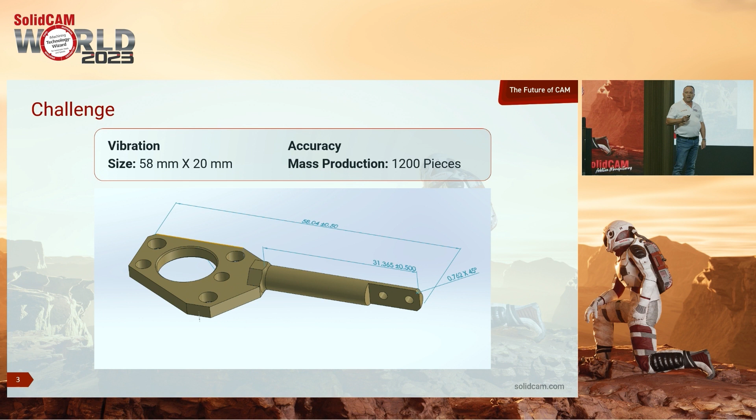And we have a few challenges in this part. First, we need to avoid vibration. Accuracy is very important in this part. The size is 58 by 20 millimeters. And mass production, 1,200 pieces. It means every second, every minute for the factory is pure money. So it's very important that we have strong functionality and wise technology. Let's see how we did it live in SolidCAM. Not me, this user. Let's start.

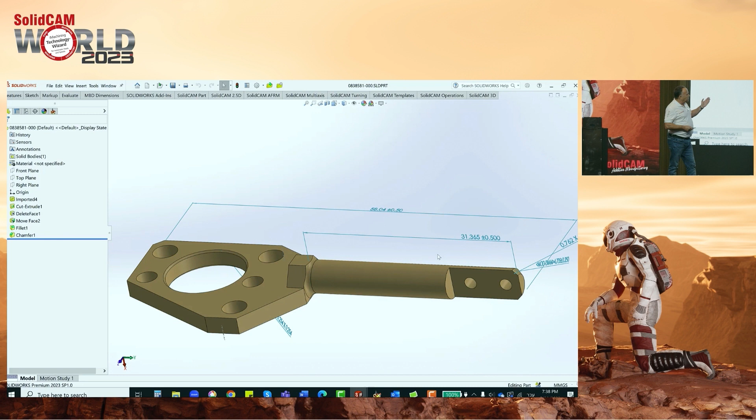Okay, we are now inside SolidCAM. I just recorded myself. So we can see here a part, 58 millimeters. Look at the right side of the bar here. It's just 4 millimeters diameter, along 31 millimeters length of the bar. So it means we need to know how to machine it. The machine in this case is DMG Mori, as we have in Schramberg in our center.

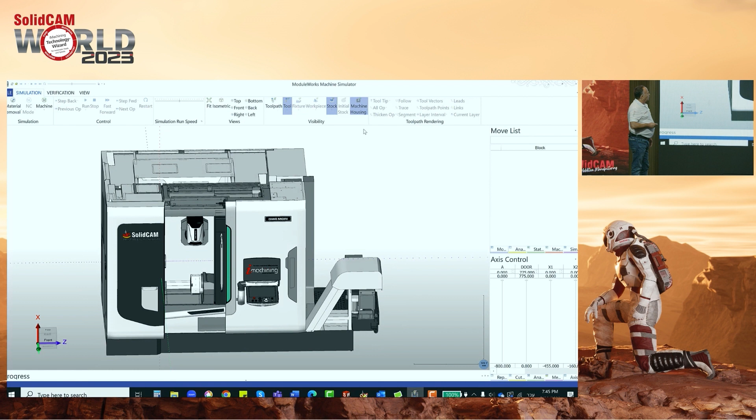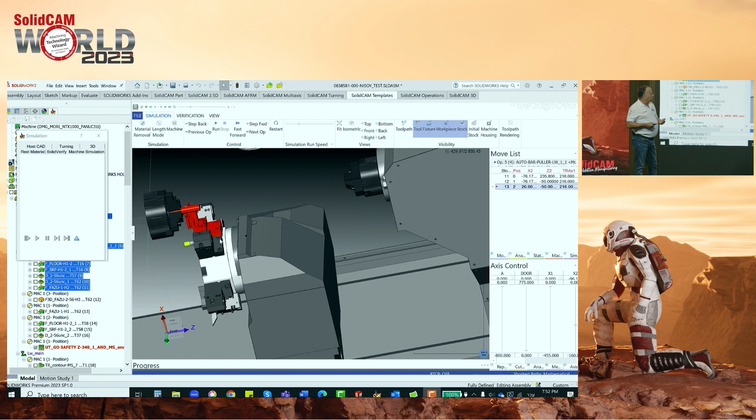With our fantastic machine simulation, machine preview, we can see that it's machined with a B-axis, lower turret, back spindle, main spindle, and we switch directly to our machine simulation after the user completed all the operations. First of all, our fantastic MCO lets the user, as you can see, with a special device, pull out the part to the right size.

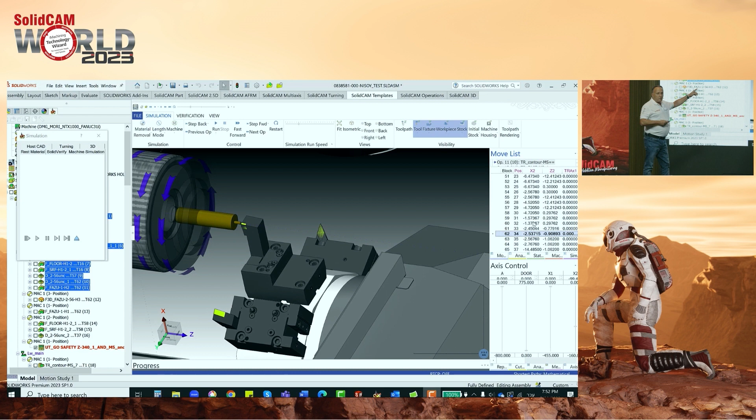And we start with the first operation, the lower turret turning operation. We start with face turning, and after it, external turning. But notice that this user works smartly. He just cuts a short portion of the part, not all the length, because the process will be stable. So we finish with the turning.

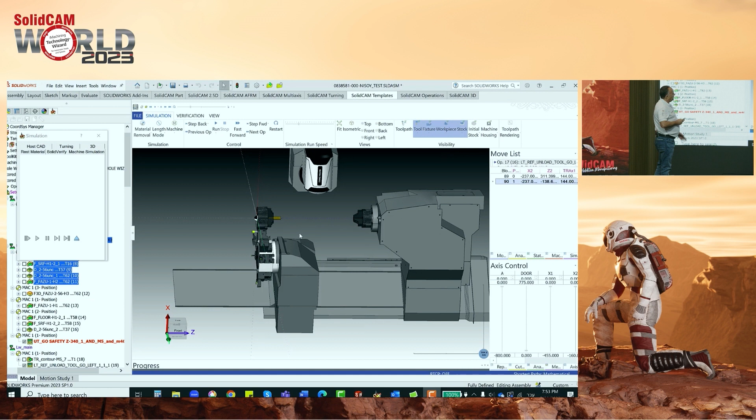We change the tool. By the MCO, we move the device to a safe distance. And now with the B-axis, in this short portion, we complete all the turning and milling operations. This is very important to keep the stability and also the accuracy of the part. So we can see profile, drill, and chamfering operations.

Immediately we switch to another fantastic simulation that I like very much in SolidCAM. This is host simulation with HostCAD.

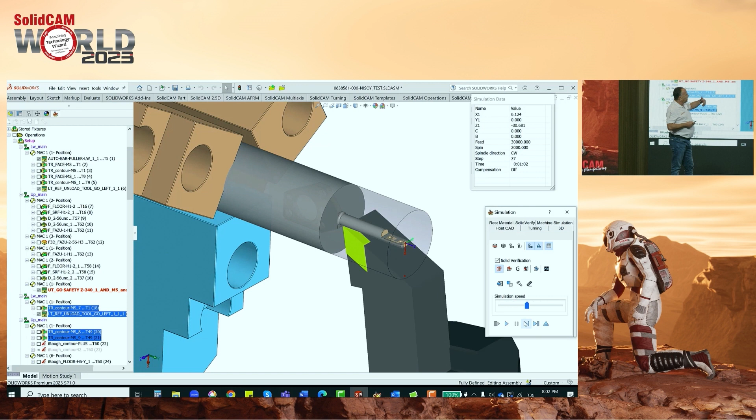Beautiful. You can see we continue the rough turning, and after it, the finish turning, and we finish with this operation. Now we jump immediately to iMachining. But iMachining is for milling? No. iMachining is for milling, of course, but it's also for mill turn.

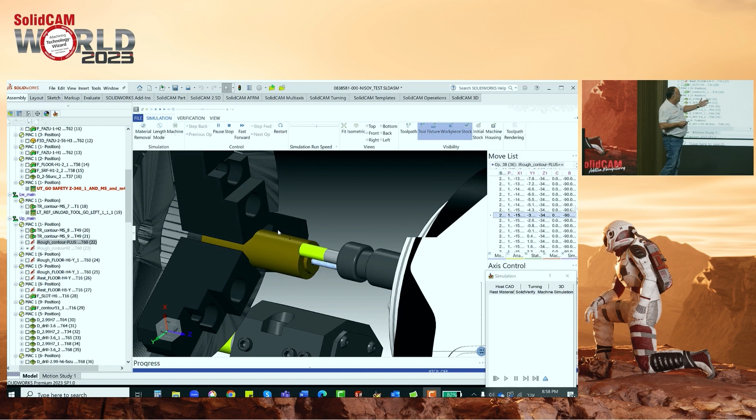And why? Because we, first of all, reduce the time. It's very important. We have a wizard that the user can get all the cutting conditions automatically. The process is stable. And we can see now a milling operation in mill turn for iMachining with the Cartesian mode from the side. And this user, of course, continues in all the rough cycle, he continues to work with iMachining.

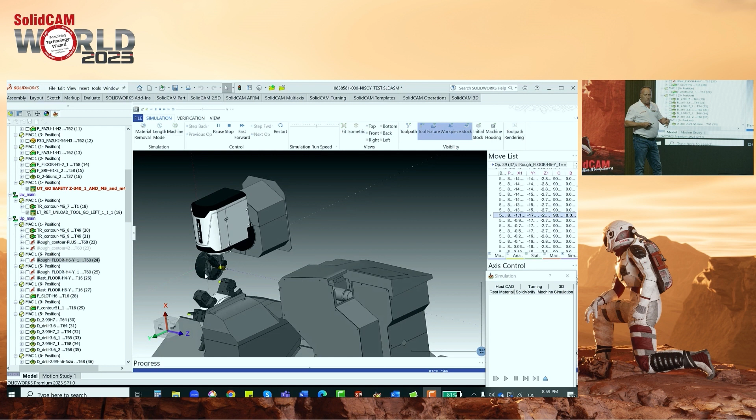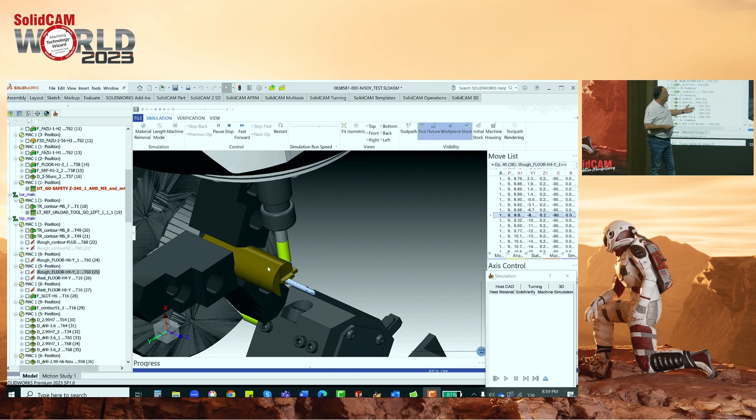So now we can see, with the B-axis, with the top view, we continue to cut with iMachining. You can see the spiral motion. We're going to finish one side. We use very easily the index position in SolidCAM. We rotate it 180 degrees and continue with iMachining, continue to machine the other side.

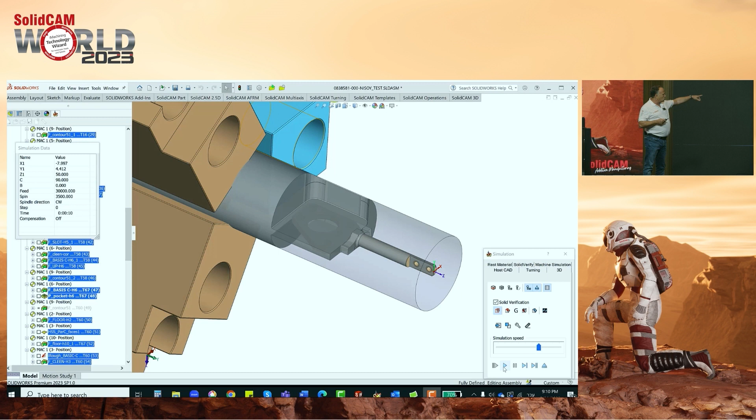And you understand it, but everyone needs to understand. Every operation here takes the user 10 seconds, 15 seconds, 30 seconds. Very easy to use, friendly. We change the tool, and we use rest iMachining. Finish with iMachining. And we continue now all other 2.5D operations.

But look, we are working with different positions. And very easily, it's a simple operation, but from multiple positions. Yeah, we can see a drilling, we can see a profile, chamfering. Now we can see a profile with clear offset. Very easy to define, and the result is fantastic.

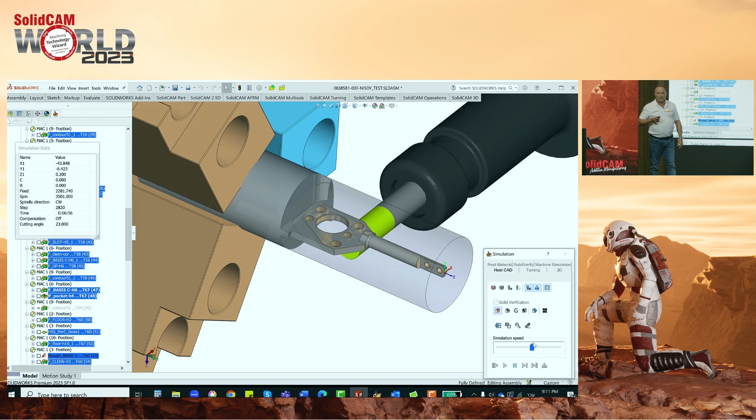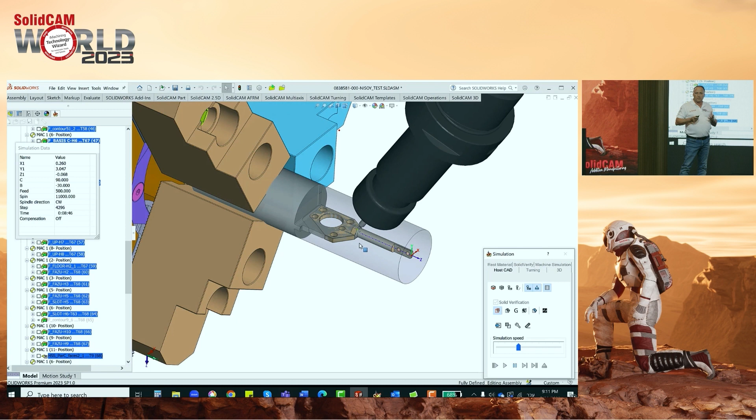Okay, the last challenge in this part is to detach the part, to disconnect the part, because we want to finish it in one setup. Before, we have HSS operation. HSS, for me, is in the core of the operation of SolidCAM. This is a very strong operation that the user uses in every part. Look, we now very easily machine the fillets from one position, from the bottom with the lower turret. HSS, I will explain about it more later.

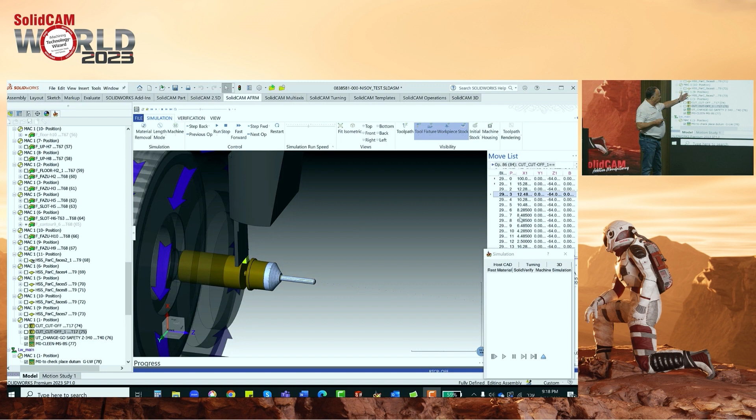Okay, now we're going to cut the part. So first, we use a groove turning operation. But now, how will we hold the part? The part will fall down. No, we don't want it. We use the MCO. Very easily, the MCO. We call the back spindle. The back spindle will come, will hold the part from the back, but now we have a very stable holding.

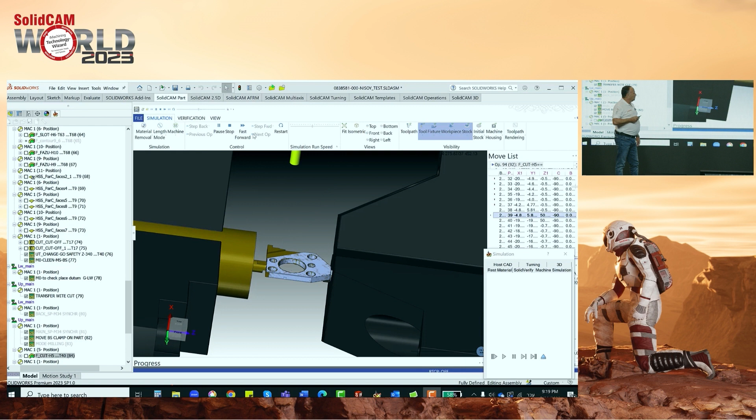You see, from the main spindle, hold, and from the back spindle, and now, with one operation, with profile, we kill two things together. One, we disconnect the part, and second, we finish the right dimension of the part. Simple, but strong. Let's continue.

So which tools did we use in SolidCAM for machining this part? We use the fantastic toolkit. I will talk about it later. We use machine control operation in every step. iMachining for mill turn. Machine preview. Machine preview is a fantastic feature for us because it goes with the user step by step, and it shows the user the schematic position between the tool and the part every time, and this is very, very important. I don't think another competitor has such a powerful thing.

We have full simulation. We have the Solid Verify, new simulator, host CAD with Solid, machine simulation. We have a variety of simulation. Just choose. And in the core of our operation is the strong 2.5D profile, pocket, and you will see more in other parts, and of course HSS every time.

Okay, let's continue. This is my favorite in the past few years. Swiss type, our solution to Swiss type. Daniel mentioned it also, we are the best solution for Swiss type, no doubt about it. We have all the functionality needed. And we have also a very strong team, which is the second leg, in many sites of SolidCAM, many countries, like Germany, like England, like Israel.

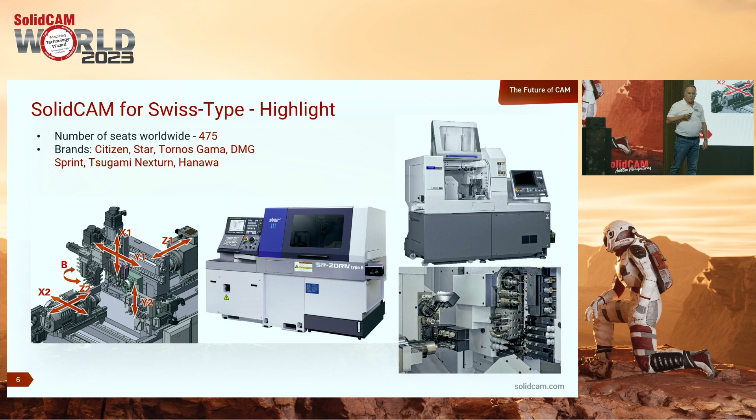We support and give answers to the most important brands in the market: Citizen, L20, L12, L32, all the types, Star, SR-20, and more. I will not mention everything. And also Tornos Gama. We have DMG Sprint also in Israel. Tsugami, it's very complicated, but we have a solution for it. Nexturn and Hanawa.